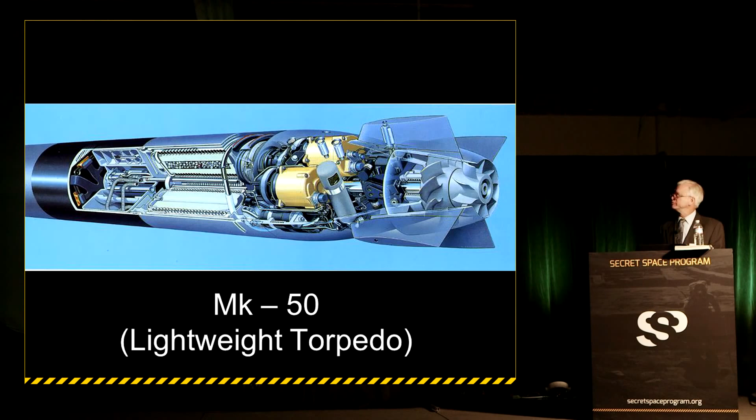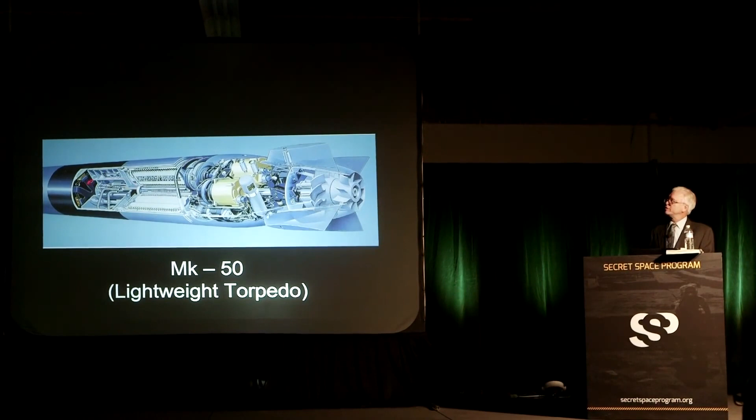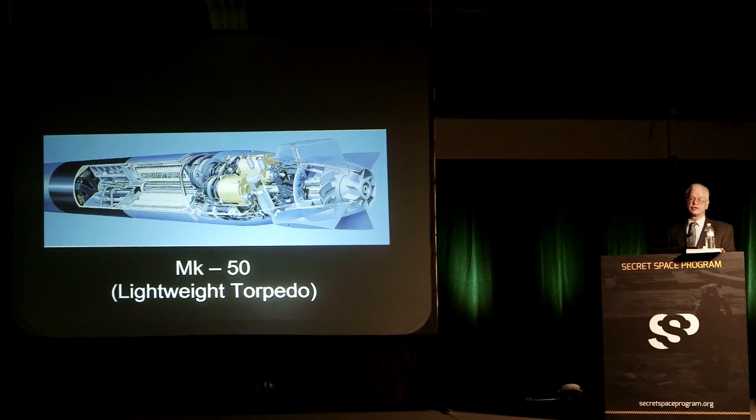This is a cutaway illustration of a propulsion system for a lightweight torpedo that basically involves a lithium core that is ignited once it drops into the water. This heats up an oxidizer, which flows through here, creating high temperature steam through these heat exchanging tubes, goes through a transmission, drives a generator, and also a couple of counter-rotating props in the back.

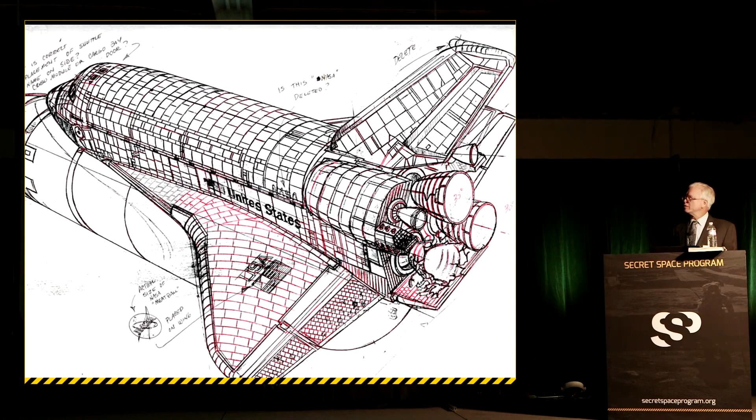Being able to figure all that stuff out, and I take a lot of pride in the accuracy of my work, involved a certain amount of engineering. Even though I'm not an engineer and don't have an engineering degree, I spent an awful lot of time studying how things are put together, how they work, what makes them function, what the physics and engineering are behind these systems. Whether it's mapping out every single tile on the space shuttle or doing the cover of a magazine on the TR-3.

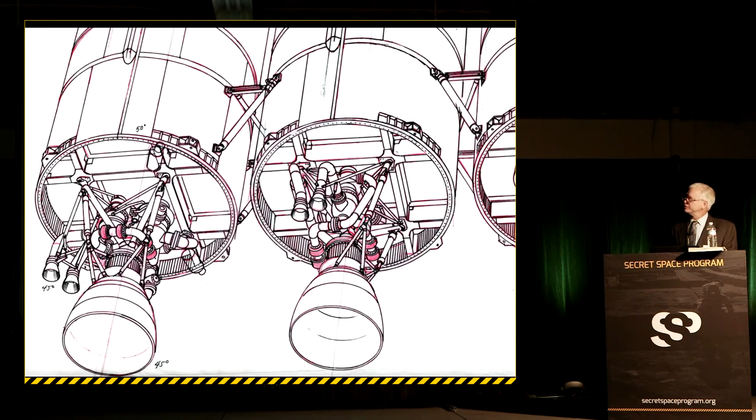Eventually, while I was working in the industry, I actually had the opportunity to make contact with a lot of people in the military, some of whom expressed an interest in having some of my artwork in their squadron ready rooms. So I was actually able to arrange to get what are called media orientation rides and go up in these planes and see how the pilots handle the stress of flying.

I asked myself years and years ago, if man had never taken the time to study flying insects or birds or bats or any kind of flying animal that we have on this planet, would they ever have had the inspiration to think of flying, to come up with the idea? And I kind of wonder whether or not we ever would have been able to get off the ground if we hadn't had those other naturally occurring creatures to give us inspiration.

As we began to learn how to fly, as the Wright brothers and all the other pioneers put together these machines, it gave us this capability. Of course, there was a military application. This was first probably seen during the First World War in Europe, using aircraft for observation or for bombing and harming enemy troops.

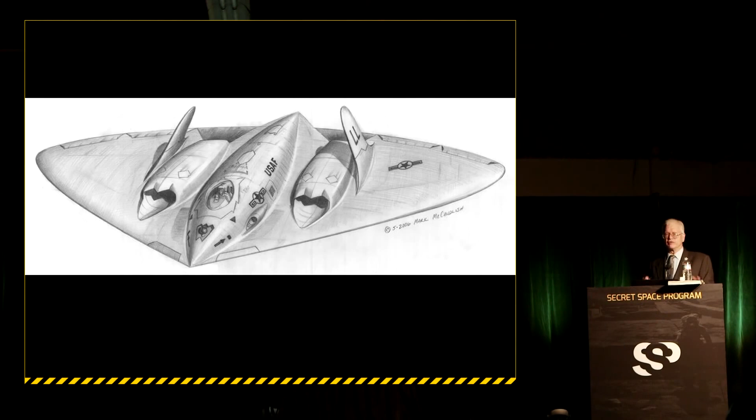There are ways that you can modify the inlets for the engines so that when a radar beam from a distance is looking at the sky where the aircraft is, it's harder for that radar to get into the inlet where those metal turbine blades are turning and reflect a lot of the energy back, letting the people watching know that you're there. Applying these different techniques, looking for ways that you can make an aircraft perform better and do it very quietly, very stealthily, even in the materials that are used.

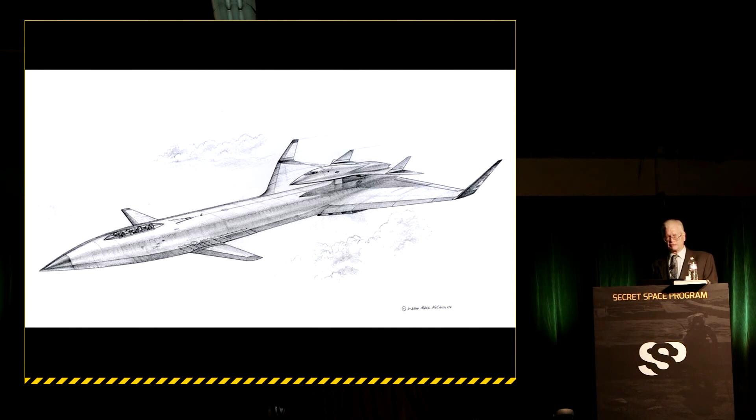It turns out that shortly after I submitted a sketch of this particular aircraft, they decided to completely scrap that. So I wound up doing an illustration of an aircraft something like this.

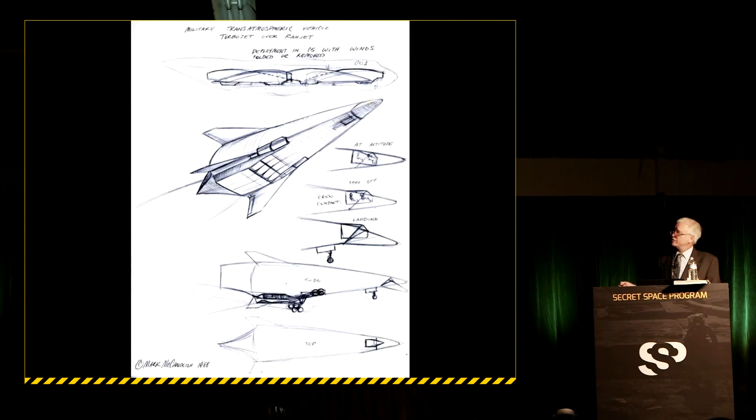There was one proposal where it might actually be possible to deploy this particular aircraft right out of the back end of a flying C-5A Galaxy. This is sort of my conceptualizing of how many you could actually fit into a C-5, knowing what the size of this aircraft was.

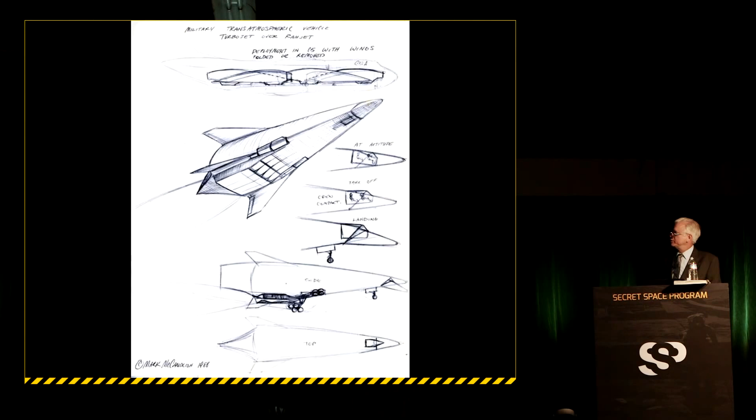It had a scramjet nacelle on the ventral surface, and it also had one on top. This particular version only had one underneath. Because of the shape of the aircraft, it made it very peculiar, or awkward, where the landing gear would come out in order for this thing to work properly.

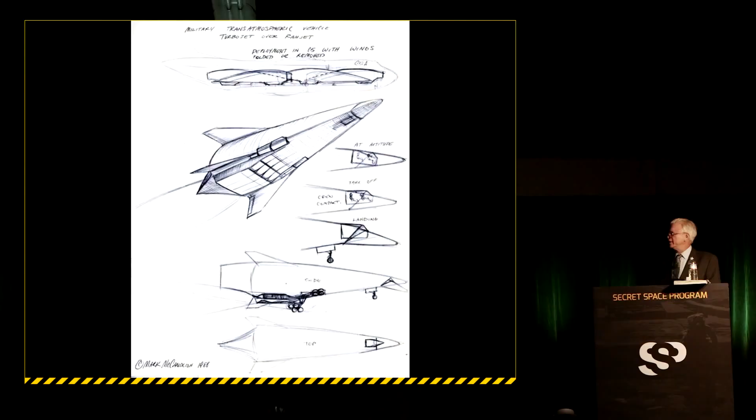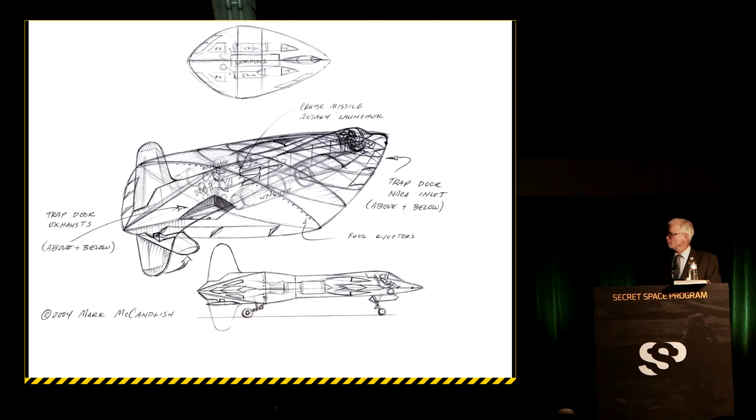Now, about the same time, there was a lot of talk about an aircraft vehicle crash that had occurred somewhere near Barstow, California. There were some people describing different features of the aircraft. There was a fellow I met and talked with who was friends with a number of the astronauts.

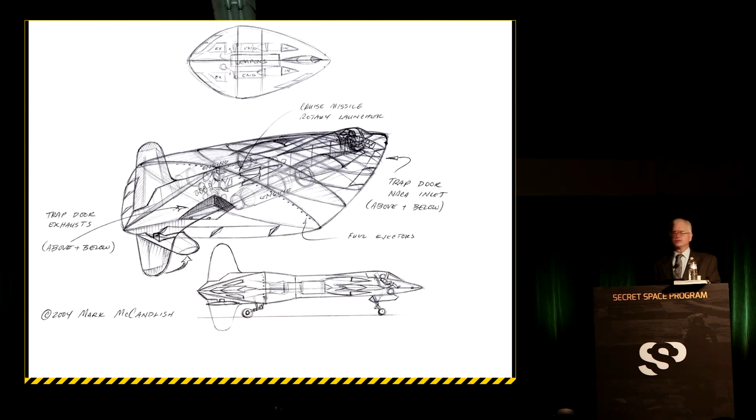They were describing how there was a particular astronaut flying a Learjet, ferrying it from one location to another through the state of Nevada. He came out of the clouds and found himself sitting slightly above and behind an aircraft that looked just like this.

Now, the interesting thing about this aircraft is that it had some very strange features. It had engines buried inside the fuselage with a sort of NACA duct-shaped inlet there. There was kind of a slot in the back, and it looked like there was maybe a trap door, control surfaces along the bottom, and exhaust diffusion.

But it also had this very interesting feature, and most people don't know this, that the predecessor of the SR-71 Blackbird, the YF-12A, which was a strategic aircraft used for missile delivery, also had a folding ventral vertical stabilizer, or tail. So this aircraft obviously had that same particular feature.

The vehicle was all black, or sort of a deep gray. As the pilot was flying along, looking at this thing through the clouds, he suddenly realized that if he hadn't seen it directly, he might have collided with it as they were flying together. So he gets on the radio to his ground control people and says, I've got some traffic up here, why didn't you warn me?

And they said, well, there isn't any traffic up there. And he says, well, of course there is, I'm looking right at it. It's black, shaped like a flattened out football, no wings to speak of, two tails, one above, one below. There was a slight pause in the transmission, and suddenly the pilot turns around, looks out the window, registers an expression of surprise and anger, banks into the clouds, and disappears.

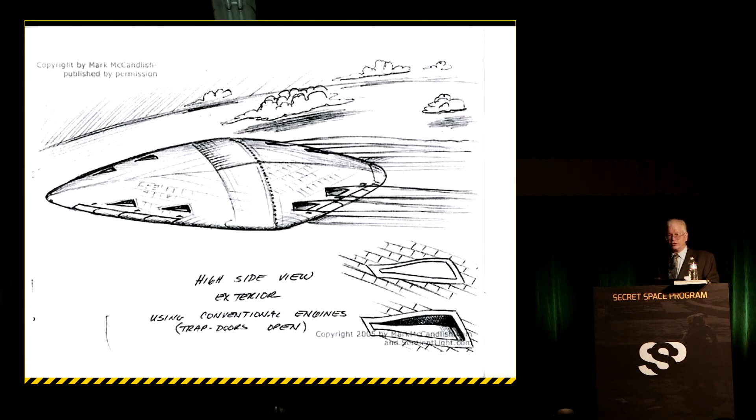This aircraft was being described within the industry as a vehicle that would produce an exhaust trail, the so-called donuts on a rope exhaust trail. It seemed to imply there were two different propulsion systems in use in the aircraft to get it up to speed. Nobody really understood what they were or what actually made the aircraft function the way it did.

As it happened, I was asked to do a painting for Popular Science on the so-called Mach 5 spy plane, and it went into details about seismic events in Southern California that raised the curiosity of some people watching what was going on. I remember at the time, this was in the early 1990s, or late 1980s, early 1990s...

You could go out into the high desert of Southern California at night and see these things flying overhead, flying back and forth. When the sun was just below the horizon, it was dark out, but there was something still up there. You could see it moving, and moving very quickly.

About the time I did that illustration for the magazine, I was contacted by a colleague, a friend I went to college with, and I invited him to go to an air show at Norton Air Force Base in San Bernardino, California, about 75 miles east of Los Angeles.

The Thunderbirds were going to fly, and it was a little overcast, but in the end I wasn't able to actually attend the air show, mostly because I had a job where I had to complete another illustration for a client over the weekend.

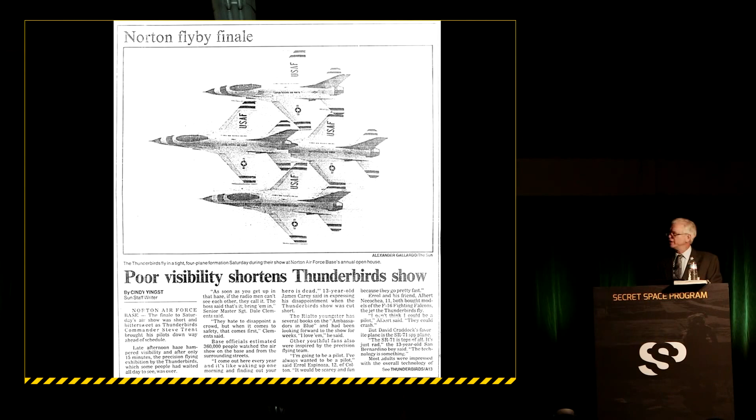As they were going into the hangar, the gentleman turns to my friend and says he just realized there are some aircraft on exhibit here that he's not cleared for, security-wise. You are not cleared to see these aircraft, so just enjoy the show, walk around, listen, take a look, but don't say anything to anybody.

They had the F-117A stealth fighter. They had the losing competitor in the B-2 advanced technology bomber competition, which led to the creation of the flying wing Northrop B-2 bomber, the Spirit. They also had a couple of odd little hovercraft.

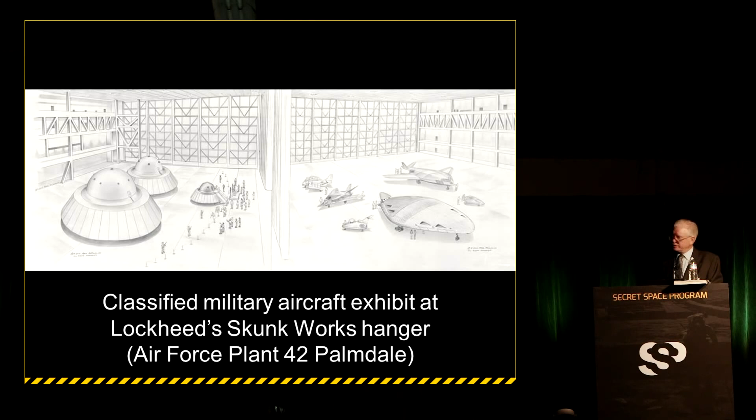Oh, I'm sorry, right here, this particular vehicle here, this is kind of a close-up, a rough close-up. It was sort of an answer to, or follow-up to, the A-10 Warthog, which was an anti-armor aircraft. It's a vehicle that carries a very big Gatling gun, fires thousands of rounds per minute, and is very durable, very hard to take out of the sky. It's very heavily armored, and has a big gun that sits inside of it.

This aircraft was designed with a very unusual kind of wing. In aerodynamics, there's something called the Coanda effect, which involves blowing air across the surface of a wing to provide lift, rather than just relying on the movement of the wing through the air to provide that same lift.

The design of this aircraft involved mounting the engines above and slightly ahead of the wing, using a high-temperature alloy shaped like a flattened-out funnel that blows right over the wing. When the wings are all rotated in sequence, it forms a smooth ramp that the air can flow down, going from horizontal, following the surface of the wing with this Coanda effect, a kind of aerodynamic adhesion. This redirects the thrust of the engine to point almost straight down, right about where the center of gravity is for the aircraft.

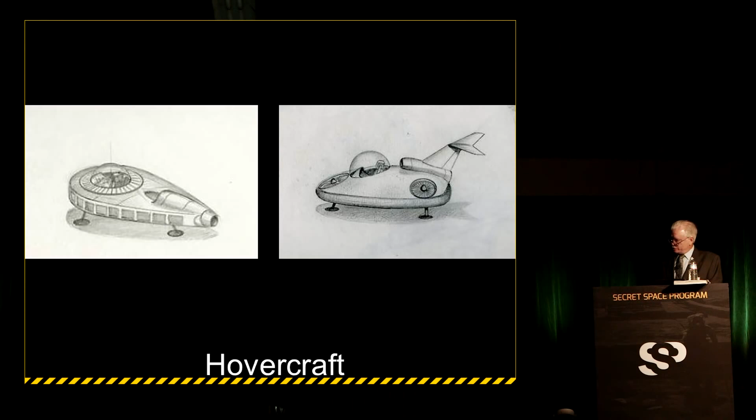The hovercraft were kind of unusual. There was one that had a jet engine in the tail, a teardrop shape, with a series of little trapdoors around the perimeter that would open and close as it flew along. This jet engine also had a transmission connected to a set of counter-rotating turbine blades that surrounded what amounted to a bubble-type cockpit, almost like something George Jetson would be flying in one of his cartoons.

This one, I've actually seen a version very similar to it in one of the popular science magazines, where it had a turbine in the front and two in the back, one on either side, driven by this engine through a transmission of sorts. It had the same sort of sphere-shaped cockpit too.

Senior Peg was the code name given to the development of the advanced technology bomber, and this was Lockheed's version. You can see it's kind of a derivation of the F-117A, with the same kind of faceted surfaces which help reduce the radar cross-section, or the amount of radar reflected back to an antenna from a source inside enemy territory.

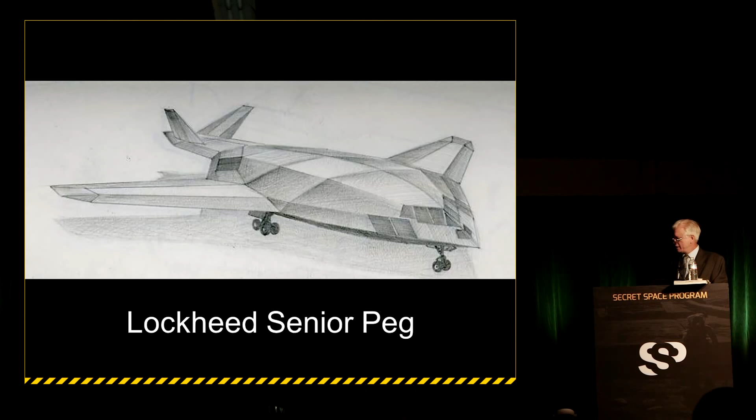It had flush inlets on either side of the cockpit with a screen over them to prevent the turbine blades from reflecting a lot of energy back out to a signal source. This was one of the more interesting vehicles, and you can see some of the stats on it below. This was probably one of the largest unmanned weapon systems built to that time.

From my different sources in the military, this aircraft, known as the first generation Aurora, nicknamed the Pulser, was entirely covered with space shuttle tiles. You can see evidence of the tiles all around the surface of the aircraft.

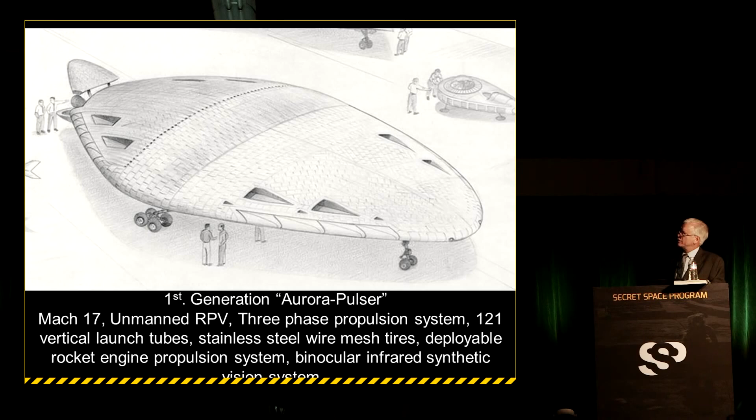Just like the aircraft I showed earlier that had the tail above and below the fuselage, this aircraft had NACA duct style inlets for 4 engines and 4 exhausts, both on the top and on the ventral surface, or the belly, of the aircraft.

After I discussed this particular weapon system on Coast to Coast with one of the hosts who was working that particular program, I received some email from a number of sources indicating that there were inlets and exhaust ports both on the top surface and on the ventral surface.

At the time of the exhibit, my friend said he could only see the underside of the aircraft. He couldn't see the top because it sat up kind of high off the ground, so he didn't know whether there were 8 exhaust ports or only 4.

It turned out that one of the people I corresponded with after doing the radio program said they had been jogging late at night when an aircraft like this was leaving one of the United States Air Force bases in Great Britain. He said what was unusual is that when it took off and lit up the afterburners, which dumps extra fuel into the exhaust stream producing a bluish glow, he saw 8 ports, which helps confirm there were 4 above and 4 below. So we knew that was true.

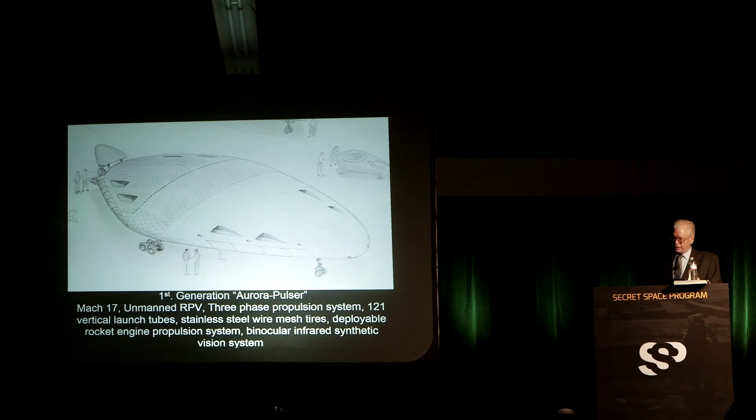Now, one of the things you don't see in this particular illustration, but is a little bit more evident in this one that I did for Aviation Week — the perspective on the underside is a little off, these should be flattened out more — is that there are 121 vertical launch tubes in the belly of this vehicle. Each one is capable of carrying something like a cone-shaped reentry vehicle, like a MIRV, which also suggests deployment from outer space.

The way the system would work was remarkably simple. It had a kind of tile with explosive bolts holding it in place on the outer skin, and sitting behind it the weapon would be held in place. It's not shown here, but I've subsequently learned there was a kind of three-piece fiberglass sabot which would hold the weapon straight in the bore, so it would always be pointing a certain direction.

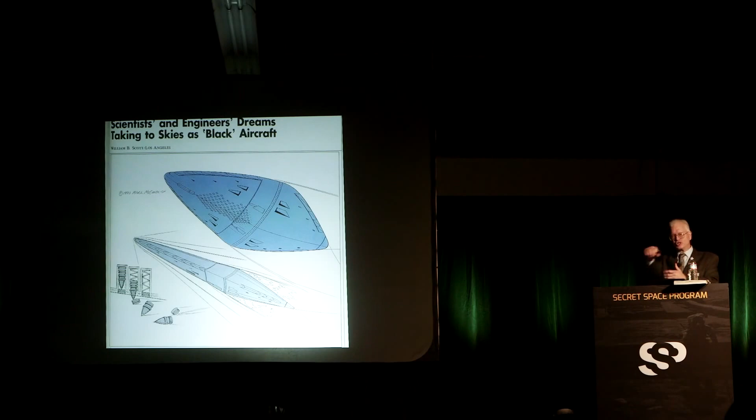The ingenious and simple aspect of this thing was that when the explosive bolts on the outside were ignited, the tile would disintegrate and blow away. And when it did, there was a big coiled spring about 12 inches in diameter behind the vehicle that would push it out of the hole. Right behind the reentry vehicle was another tile that would slam down into place and cover up that hole again, almost in a tenth of a second.

The reentry vehicle — let's see, where are we? Right there — would then stabilize, because of its center of gravity weights and the shape of it, in the airstream, go into the atmosphere, and be able to acquire its target and do its job.

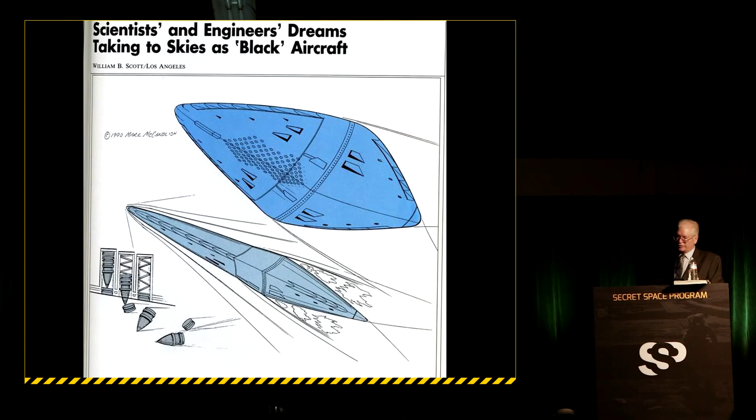One of the things this particular aircraft would do: if you look at the ridge where these fuel ejectors were located, it would expel fuel, and the fuel would be ignited by the intense pressure and heat of air flowing across the front of the aircraft. One thing the artist didn't capture was that the front end is going through the air so fast that it's glowing red hot, just from the velocity and friction at such high speed. As that air is further compressed coming up on this ridge, it meets the fuel, and as the fuel is sprayed into the airstream, it spontaneously combusts. But by this time the aircraft is already going well above Mach 1.

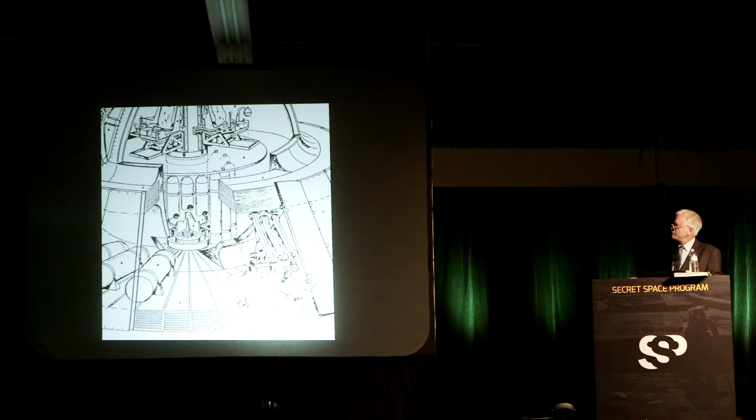So if you have, as in this instance, coils of single filament copper wire - or at least what appears to be single filament copper wire - running through this quartz-like material without multiple strands to conduct more electricity, it just seems like a contradiction. So I began wondering if this wasn't just copper wire, but copper tubing, with something else on the inside of it.

So then I looked at some of the notes from the eyewitness, and he described, on the inside of this central column, something wrapping around the inside of that tube. I thought of this like a high voltage device, sort of like a cyclotron, or some kind of device that produced high voltage. I think what was really happening was that the electricity would jump between these two points and create a high voltage event.

Now, it turns out there was a friend of mine, a physicist, who went to Edwards Air Force Base and was given a tour, and he was actually shown what is called a free energy device, or an over-unity device. This was the electrical circuit design for that device.

It amounts to a kind of glass tube, with an anode down here and a cathode. You have a high voltage source, a takeoff point for your oscilloscope, a load resistor, and so forth. Then you have a coil that's in the circuit itself, resonant with the circuit, wrapping around the outside of it. And then you have a sheath that's grounded over here - that's what that symbol means right there.

This device that my friend saw was supposedly putting out 125% more power than you would actually put into it. This is what you call an over-unity device.

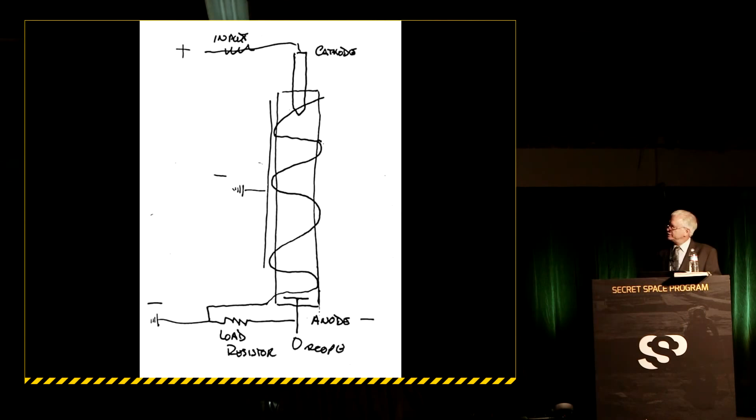So I started looking at what zero-point energy is, where it comes from, and how it can be manipulated. I looked at some of the papers written by scientists like Bernard Haisch, Alfonso Rueda, Hal Puthoff, and Daniel Cole. In the early 1990s, they wrote a number of papers that actually described this, and you can see the similarity between the two things, a clear design similarity.

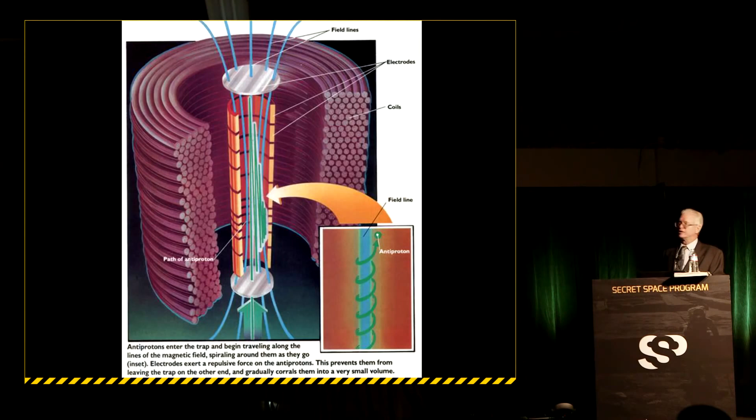And yet I looked for other possibilities as well, the possibility that we had something like an anti-proton trap going on here, where there might be some aspect with the same kind of coils going around the outside, a central column, a way of trapping antimatter. I thought this might be something like the so-called antimatter drive used in some of the Star Trek vehicles. So I began conceptualizing, looking at different ways you could actually make this system work.

Somewhere in the late 1990s, early 2000s, I came across a number of books describing how Joseph P. Farrell, another one of the speakers here, had found historical records after the Second World War describing a device being worked on by the Nazis in the Wenceslas mine up in southern Poland, called the Nazi Bell Project, or Die Glocke.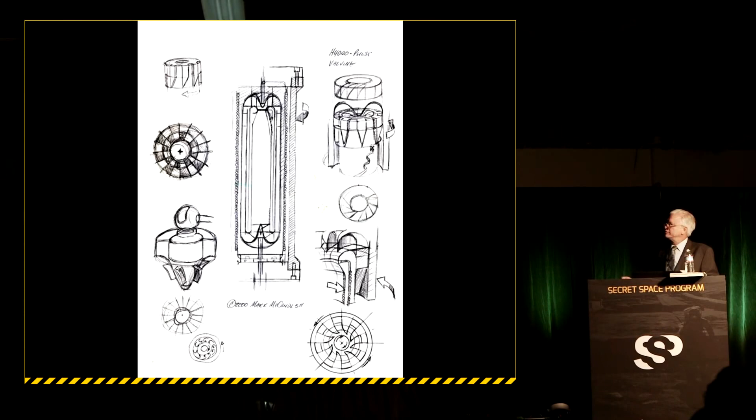That particular system, based on the documents found, was made up of a pair of counter-rotating cylinders, one inside the other, with a coil that went around the outside, and electricity was being fired through the system. So I started looking at ways that you could make that work.

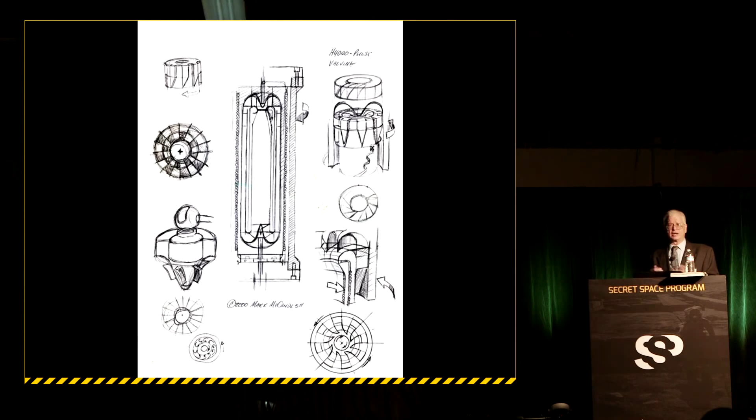The first thing I thought of was that if you put a lot of electricity in this thing with big coils around it, you may wind up in a situation where you can't get an electrical motor to actually drive the system, unless you had a pulley system sitting way off to the side, away from the electromagnetic fields that would interfere with its operation.

But I found out that mercury has some interesting characteristics, something referred to as the nuclear spin ratio. The particles in the nucleus of the mercury atom and the electron shells have a spin ratio of something like 60 to 2. Bismuth, by the way, also has the same kind of property. I thought it was interesting that these two materials had these unusual characteristics that might make them very important in the operation of this kind of device.

What I found goes all the way back to Michael Faraday. The first electrical motor was really just a puddle of mercury with a permanent magnet sitting in the middle of it in a petri dish.

He had a little scaffold off to one side with a copper conductor. One wire went into the mercury, connected to the battery, and another wire hung down from the top of the scaffold. The minute you connected the circuit, the mercury would begin circulating around inside the petri dish, around this magnetic field.

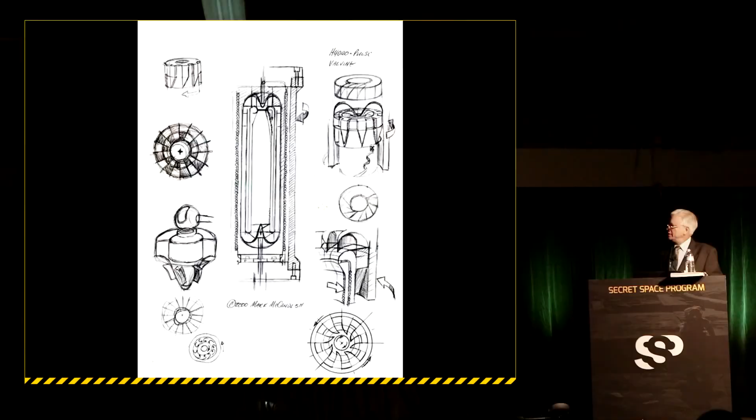If you look at the way the field lines are set up in this particular vehicle, you can see that the field lines basically go out around the outside and stroke down through the middle. By setting the system up this way, you already have the built-in mechanism to make this thing rotate on the inside, just like Michael Faraday's little motor from back in the 1820s, I think it was.

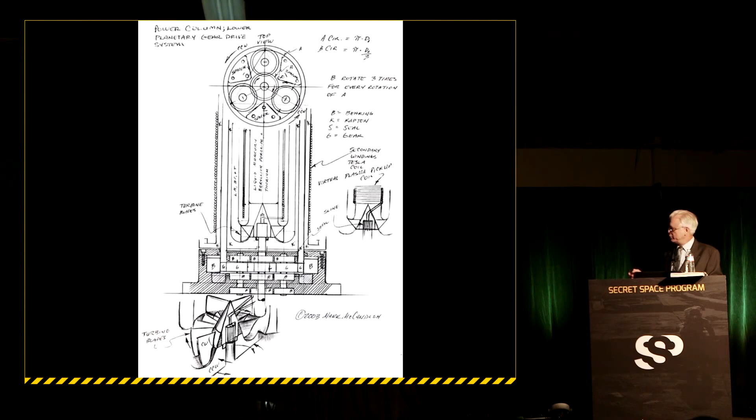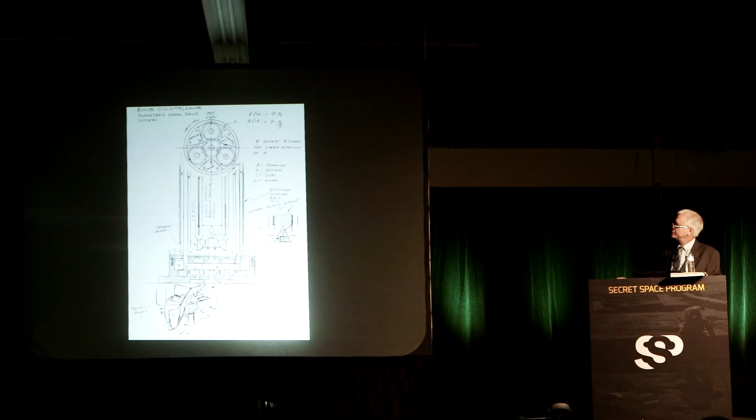The other thing I realized was that you're going to have some way of circulating the mercury. In one of the instances I was looking at ways to mechanically do this and get this counter-rotation going, as described in some of the papers from the Nazis' experiment, was creating a kind of planetary gear drive system that would sit either at the top or bottom, so that as one cylinder turns one way, the gears would force the other cylinder to turn in the opposite direction. The benefit of this is that when things are turning in opposite directions or sliding across one another, you get this vorticular motion in the mercury.

It seemed to me that that particular vorticular motion was something that would be very significant, very important to the operation of the system. And it's all leading up to the tapping of zero-point energy, which I'm going to get into shortly.

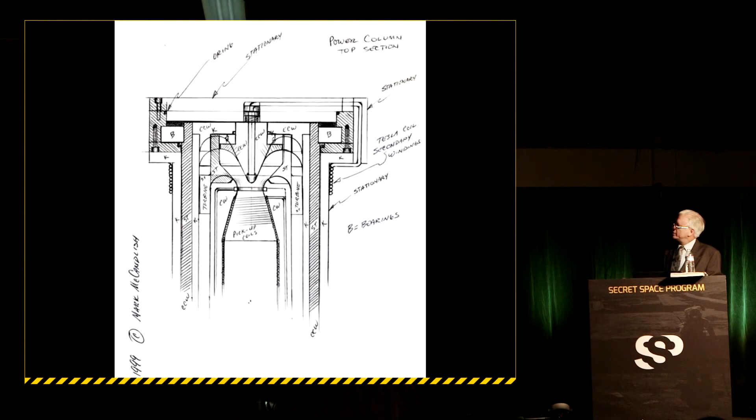The idea was that the mercury would come up in the gap between the two cylinders, reach the top, and be forced down through this venturi, this little funnel-shaped opening in the bottom. You'd have your cathode up here at the top, and a ring embedded in the quartz of the interior cylinder — this is the other cylinder on the inside.

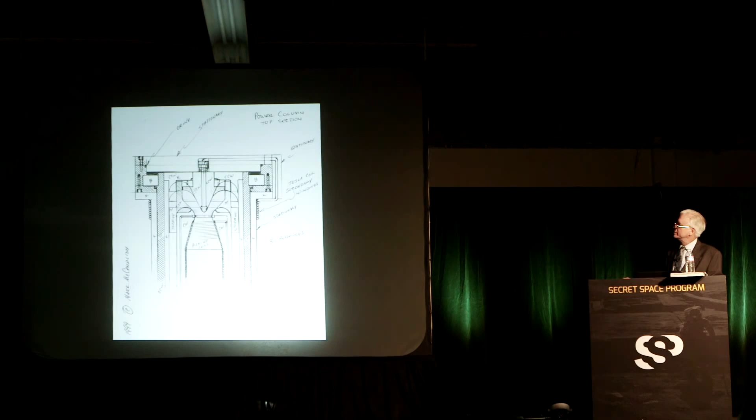You'd have coils inside so that as the mercury was being charged with electricity, it would cause the mercury to circulate. But because the cylinders are turning in opposite directions, you get this natural tornado-like vortex formation in the movement of the mercury through the system.

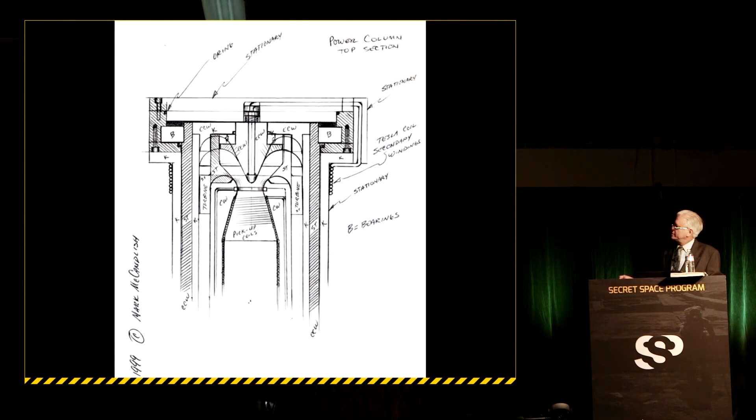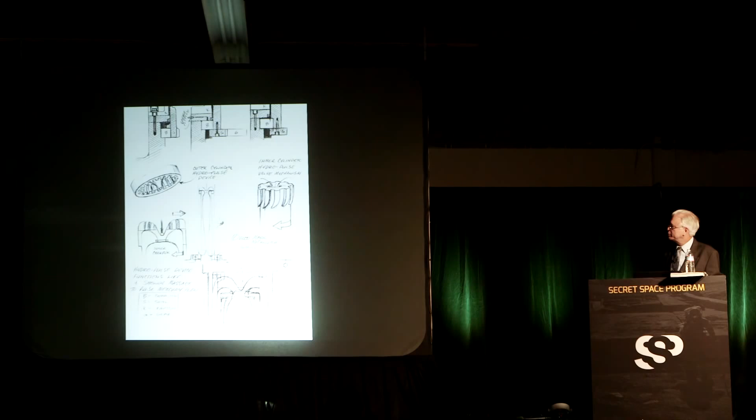The next thing I did isn't as easy to see in this particular diagram. I wonder if the next diagram shows it better — yeah, here's a better way to see it, down here in the corner. The mercury comes up here and goes down through this opening, and right below that second electrode, shaped like a ring, you get the electricity jumping from there to there as the mercury is being pumped through by the natural flow caused by the electricity going through it.

A sudden discharge of electricity goes through the mercury while it's spinning the whole time — spinning like a tornado. You send the electricity through it, and it creates a phenomenon very similar to when a smoker blows a smoke ring.

If you've studied a smoke ring, you can see it's caused by a sudden discharge of smoke from the lips of the smoker, and the surrounding still air slows down the outer edge of the smoke as it's expelled. This creates a self-stabilizing event where the smoke forms a perfect ring. Even dolphins can do this with the air blown out of their blowhole.

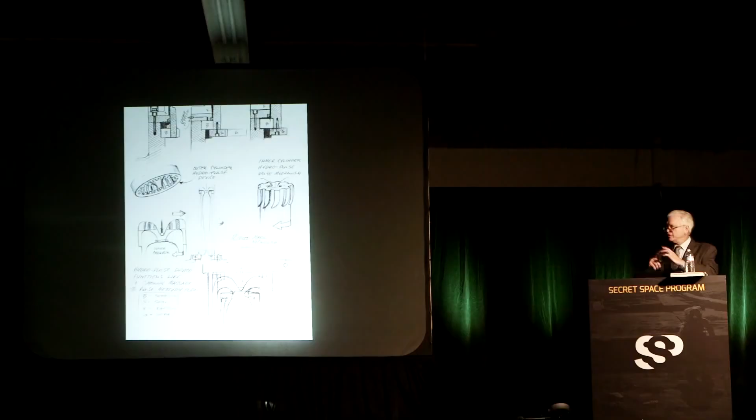The other thing about that is you find this phenomenon moving downward, probably approaching supersonic speeds, down through this central column.

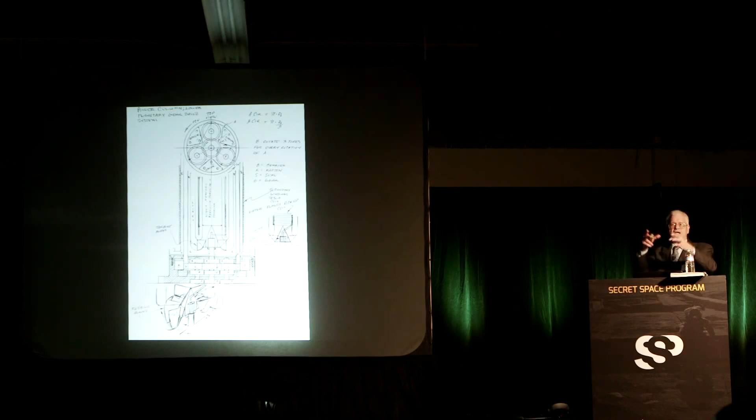There we go, down through the center, right there. Because of the rotation of the device, it's creating a kind of a smoke ring of ions, highly charged ions blowing down through the center of this device. But you also have a precessing, a rotating around a horizontal axis and a vertical axis, so that you have this twisting motion that goes on.

What that actually winds up simulating is ball lightning, which is a naturally occurring phenomenon. It's noted for its ability to be self-sustaining. It creates its own electromagnetic field.

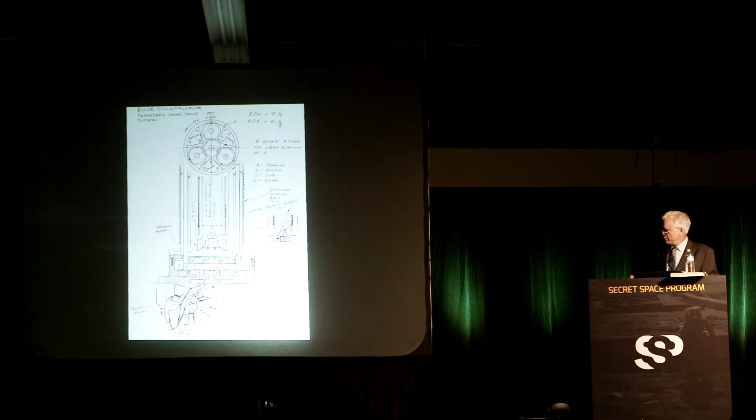So in the process, what I really think I've stumbled across is a way in which this system has three different electromagnetic fields. It has the one created by the secondary windings of the Tesla coil, and it has the windings in the center that also create their own electromagnetic field.

But then when that plasma ring - or I should say it's actually more of a low temperature plasma-like phenomenon, or a virtual plasma - fires down through the center, it also creates its own set of electromagnetic field lines.

So what happens is you have an effect very similar to the electromagnetic pulse that occurs when a nuclear bomb goes off. Well, they actually have a weapon called the explosively pumped electromagnetic pulse weapon, and it does the same thing.

What it does is combine overlapping electromagnetic field lines, and then using explosives, it pinches all those magnetic field lines and creates a powerful pulse. So what I'm suggesting is that process actually forms a kind of a doorway for tapping into this zero-point energy.

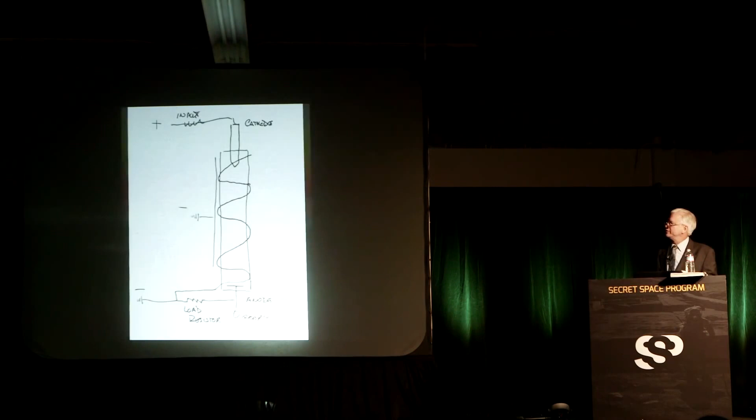Now, why is that significant? Why does that mean anything? Well, part of the reason is that this device, when it taps into zero-point energy - they've shown that zero-point energy is actually responsible for the effect of gravity, for inertia, and for mass.

And so if you're pulling some of that energy out of the environment, it may be - even though there's an infinite amount - some of the latest figures are 10 to the 109th power joules per cubic centimeter. That's one of the latest figures I've seen. That's a monstrous amount of energy.

That's enough energy that if you took all of the energy in this amount of space-time and were able to tap it, it would be able to boil off the oceans of the entire planet. So you can see how this technology makes a hydrogen bomb look like a firecracker.

That's probably one of the reasons why there's such a tremendous effort to suppress it, because in the wrong hands, obviously, it could be weaponized and be very dangerous. But if used in peaceful ways, of course, it provides you a tremendous amount of power.

And that power, when pulling this energy out of the environment - it's my belief that there is a moment in time where it doesn't allow that zero-point energy to interact with the atomic structure of the vehicle. Now, this interaction is what is referred to as the creation of mass.

Now, for example, Einstein said you can never travel faster than the speed of light, because as you accelerate through space-time, your interaction with the zero-point energy embedded in space-time raises your mass. And so it makes it harder and harder for you to go faster and faster, so you can never really reach the speed of light.

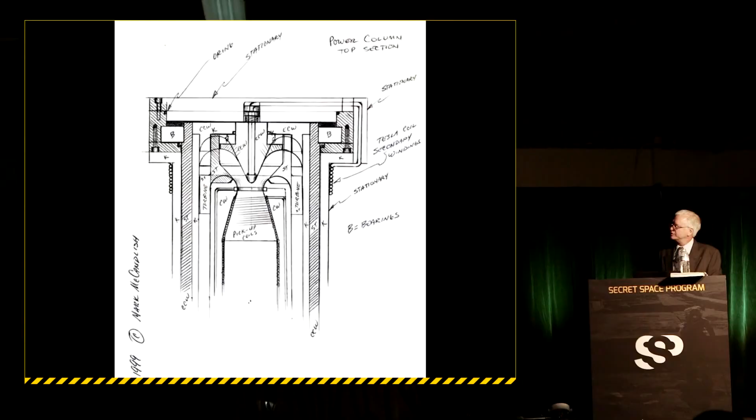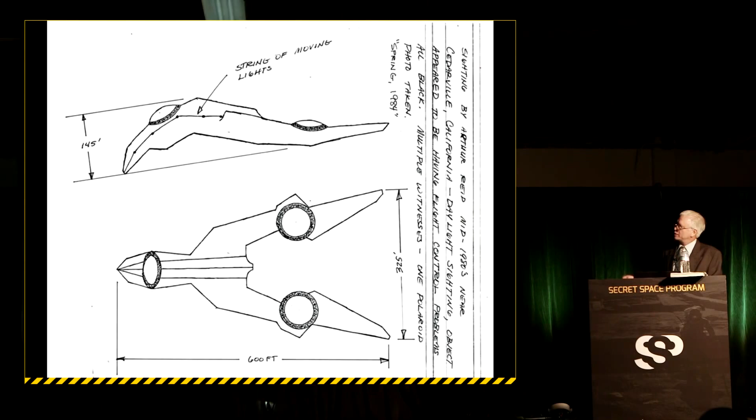Under a loupe looking at the original Polaroid, you can actually see a little bit more detail. This was a drawing done by the eyewitness, the fellow who took the photograph. There were some things about it I could go into, but the important thing to remember is that some of the features look remarkably like some of the structure on the so-called alien reproduction vehicle.

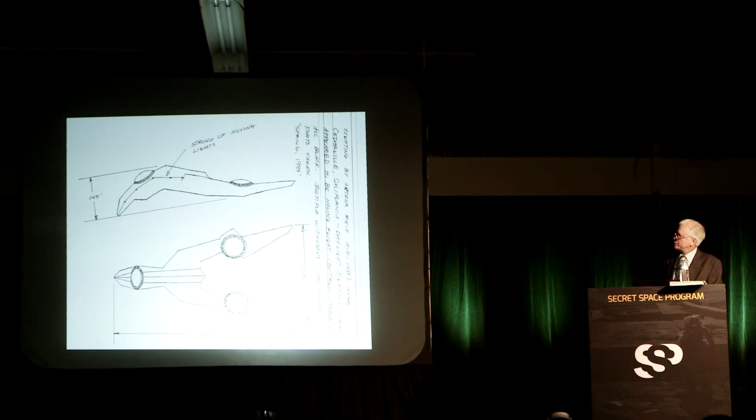It did seem apparent to him that these wingtips, if you want to call them that, could actually rotate inward so that this thing would become more of a triangular shape, which also would help with issues like storage.

Now this is a little bit more detailed drawing that I did based on what I could see through the loupe. It actually looks like there may be some ways in which this area and this area here can be articulated, so the thing can kind of fold itself up for storage or for putting it into a hangar.

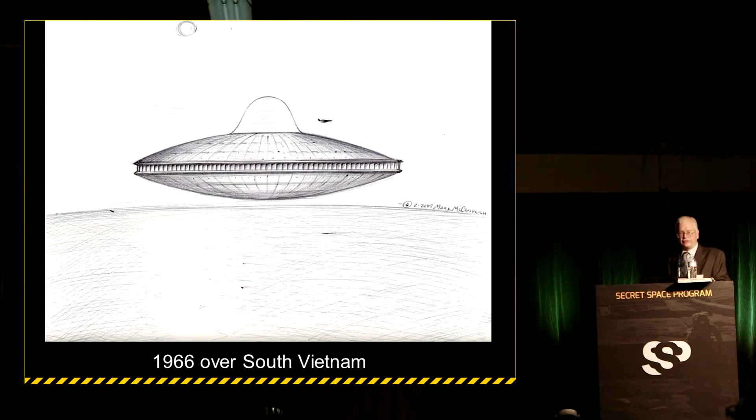Now there's a lot of other incidents, eyewitness testimony, pilots that I've spoken to. This particular image refers to a sighting that occurred back in the mid-60s on the way back to Vietnam. That aircraft right there is a B-52, which is a huge aircraft.

They said that this vehicle had a translucent illuminated dome that they counted 27 stories in there, and that was kind of how they helped to gauge the size of the thing. He said that each one of the turbine blades, these rotating turbine blades around the perimeter, each one of them was the size of a bypass door on a huge hangar.

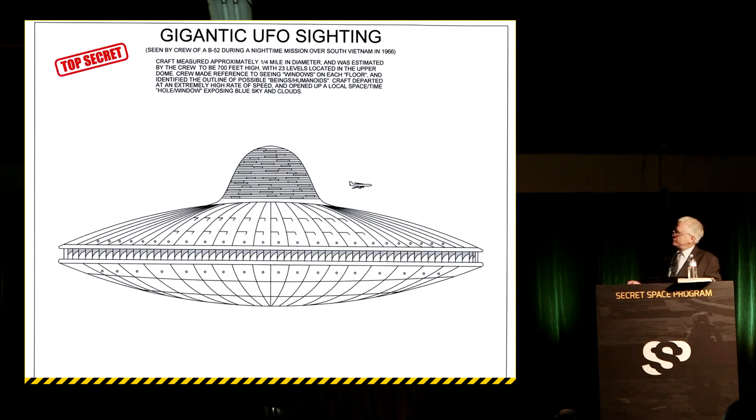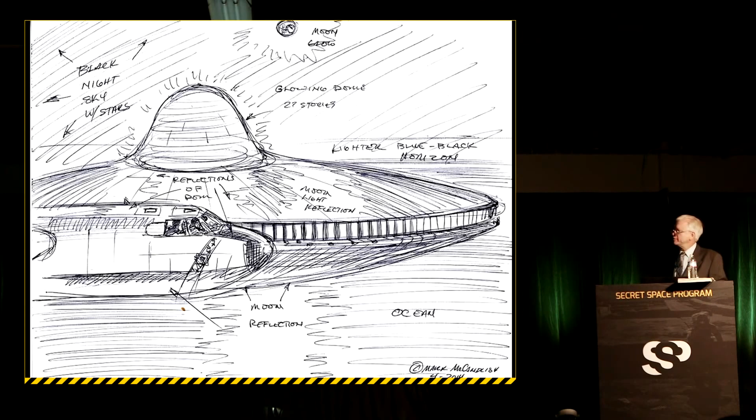One of the things that was significant about this particular encounter, based on an eyewitness, it's just a rough sketch here, but this was taking place at night over the ocean at 1 o'clock in the morning, no clouds, just the moon. This large disc, which they estimated to be a minimum of a quarter of a mile in diameter, when it departed, as it went out through the blackness in the sky, in its wake was this turbulent, shimmering image of what looked like a blue, daylit sky with clouds.

So what seemed apparent to the crew of this B-52 was that when this thing created a wormhole, there was actually kind of an image dragging that would go along with it, that it would either show you where it was going to or you'd see some of where it had come from. I've personally witnessed that on at least 2 occasions. Very often you find these types of events are very mystifying and hard to understand because you don't readily understand what it is you're looking at.

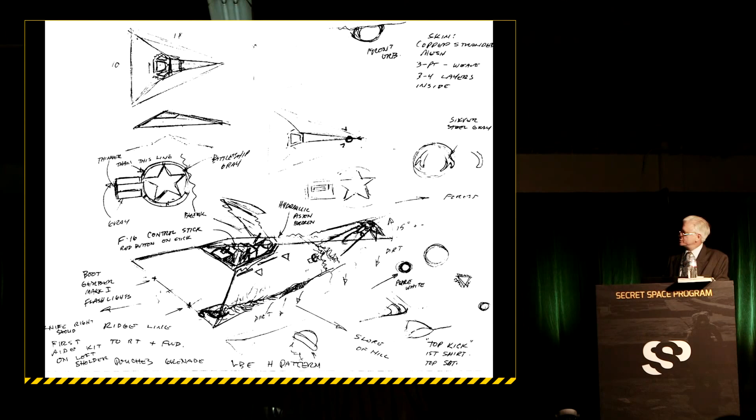Now, like I say, I'm running out of time here. This is a crash recovery that occurred in May 1989 in East Germany by some of our special forces. It was a vehicle utilizing what appeared to be a lot of stealth technology. The canopy had a lot of the same kind of details you would see on the stealth fighter, the same sort of jagged edges and features that would help defeat radar reflection, things of that nature.

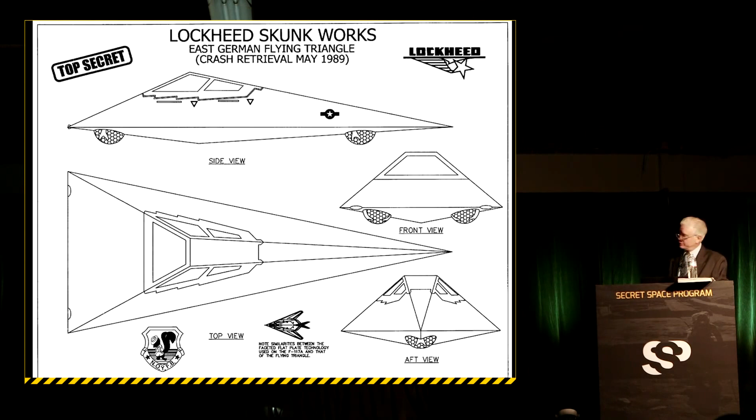This is a mechanical 3-view drawing done by my friend and colleague Michael Schratt, who I owe a lot to for helping me put this presentation together. What was interesting about this particular vehicle was that it had these spheres that appeared to be made of a white ceramic material, like a superconducting ceramic, like yttrium, barium, copper oxide.

When the vehicle crashed, the pilot hit a tree coming over a ridge line and then tried to pull the nose up. He hit tail first, and when he hit tail first, it broke the tail in half, and it released one of these spheres.

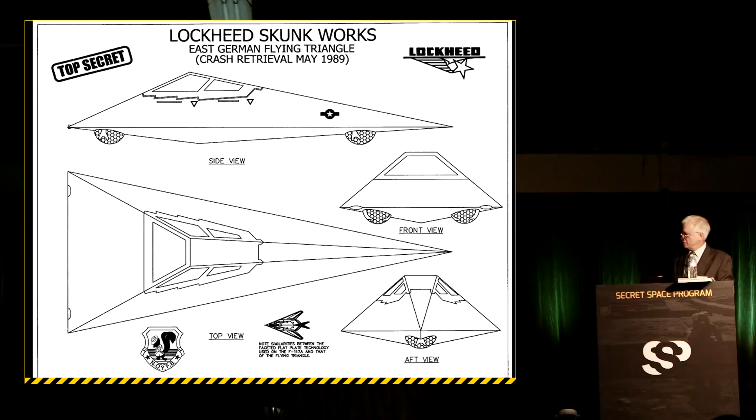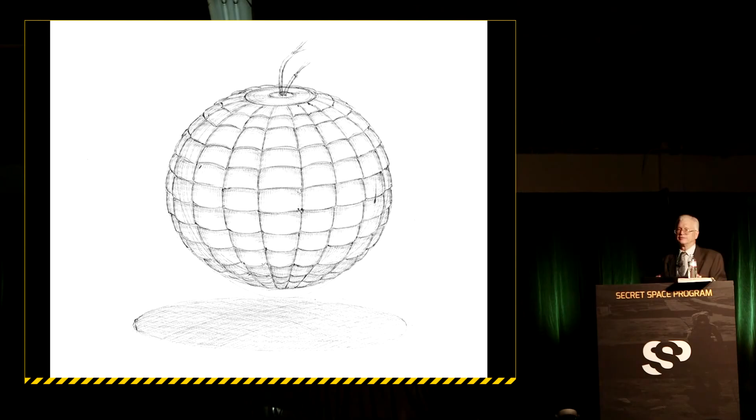He said that when the thing was bobbing around the field and they were trying to recover it, every once in a while it began to spin and wobble and get a little faster, and then sparks would jump across the two exposed wires, and it would slow down and calm down again. They were given an aluminum utility case to try and capture this thing. They were told not to touch it with their bare hands.

So there's two reasons I can think of. One, either they're using cryogenic fluids and it's really, really cold, and they might get a burn, or they might get electrical shock, which seemed pretty apparent. But the thing was floating above the ground.

One of the things we know about superconducting materials, thinking of this in the context of a propulsive system - if you've seen films on YouTube of superconducting wafers floating above magnets, they have to be set, as it's referred to, in situ, in order to create that levitating effect. In other words, you have to chill that ceramic material down right at the spacing you want to establish between the magnets and the object itself, so it'll maintain that attitude. You can crank it to a certain attitude and it'll maintain that attitude, and you can move it around, but it'll always stay at that one reference angle.

So I started thinking that if this thing is filled with some kind of cryogenic fluid, and this is some kind of high-temperature superconducting material or ceramic material on the outside, you can see the scalloping may actually create a kind of turbulence pattern on the inside that helps to stir it up. One of the things we know about superconducting materials is that when they get anywhere near moving magnetic fields, they produce a lot of electricity. And that electricity, unlike normal conductors which cause the energy to bleed off, superconductors tend to hold that charge for a while.

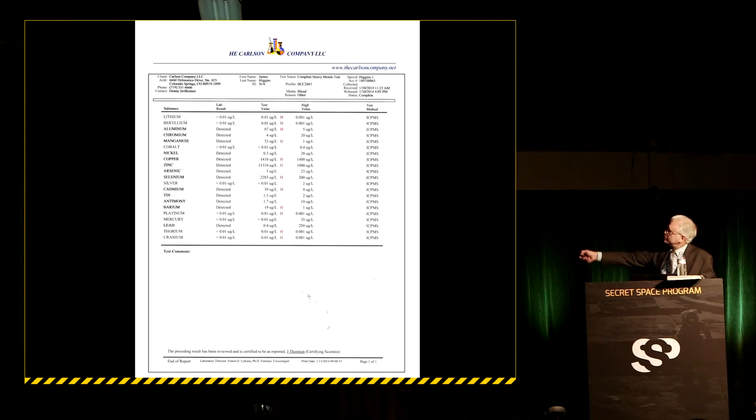The manner of his illness was so peculiar and so strange, we decided to go have some pathology done. What we found, it's hard to see on this chart because it's so small - I wish I could blow it up somehow - but basically all these little things with an H next to those levels are radioisotopes like uranium, thorium, beryllium, cadmium, things you would not find naturally occurring. So it seems apparent to us that he was poisoned using radioisotopes.

So I would like to dedicate this presentation to the memory of my friend James Higgins. He's a brilliant young man, had great potential as a filmmaker ahead of him, and I thank him for the time he dedicated to documenting what I did. I'd like to thank you for your time and your attention. Thanks very much.